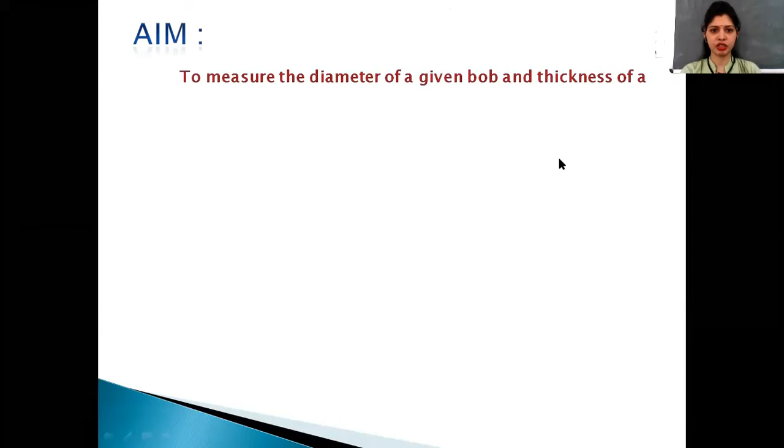Aim of the experiment is to measure the diameter of a given bob and thickness of a given glass plate using micrometer screw gauge.

In this experiment, we will be provided with a bob and a glass plate. By using the micrometer screw gauge, we are going to find the diameter of the bob and thickness of this glass plate. Let us see the apparatus. Apparatus are bob, flat glass plate, screw gauge, etc.

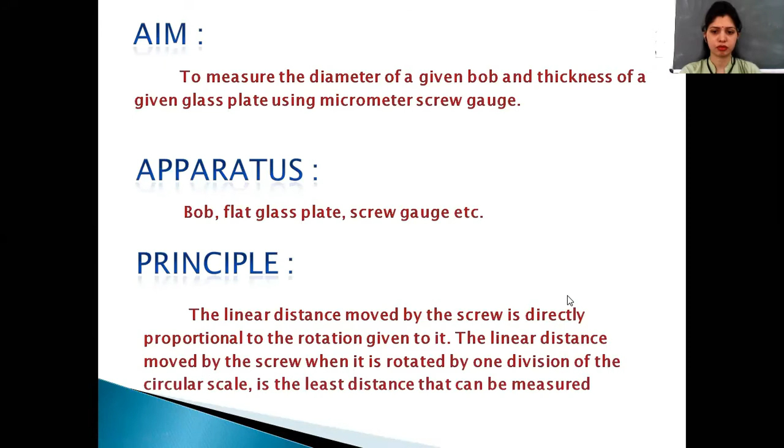Principle: the linear distance moved by the screw is directly proportional to the rotation given to it. The linear distance moved by the screw when it is rotated by one division of the circular scale is the least distance that can be measured accurately by the instrument.

So the principle for this experiment is the linear distance moved by the screw is directly proportional to the rotation given to it. The linear distance moved by the screw when it is rotated by one division of the circular scale is the least distance that can be measured accurately by the instrument, and this is the least count of micrometer screw gauge.

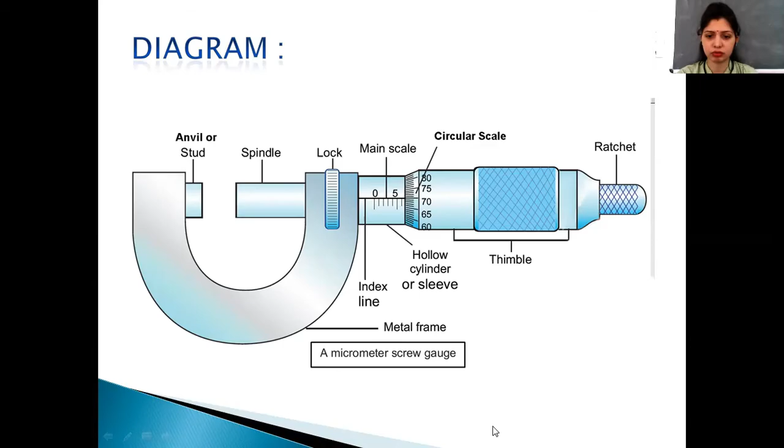The live micrometer screw gauge I will show you, so that you can understand it very easily. I have shown you the diagram of the micrometer screw gauge. Now I'll show you the apparatus to perform this experiment.

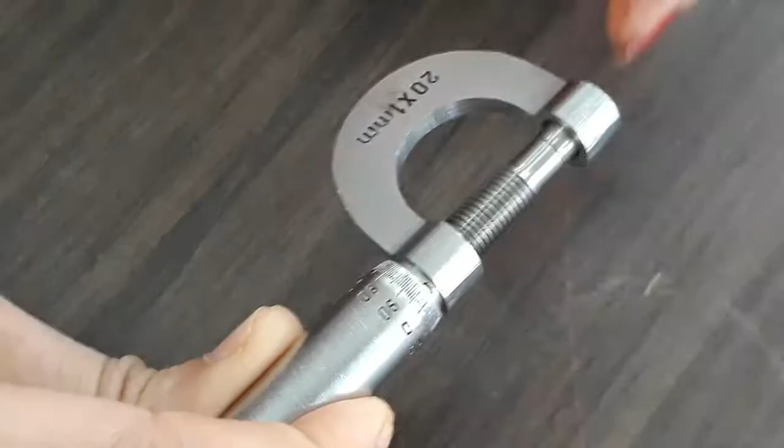This is called the micrometer screw gauge, and to perform the experiment we need apparatus such as this bob. Its diameter we are going to calculate, and this is the glass plate. The thickness of this glass plate we are going to measure by using the micrometer screw gauge. The micrometer screw gauge reading we are going to measure in terms of mm, that is millimeter.

This is the pitch of the screw, and there is one knob. If you move this knob, then what will happen? One scale is coming out, and this scale is called the linear scale, and the one which is round like this is called the circular scale. We are going to deal with these two scales.

This is the linear scale, this is the circular scale, and we are going to fix the apparatus in between these two jaws, and by using this screw we are going to fix it like this. If you rotate this, it is going to get closed. You will be able to hear one sound. Once you hear this sound, you are not going to move this again and again.

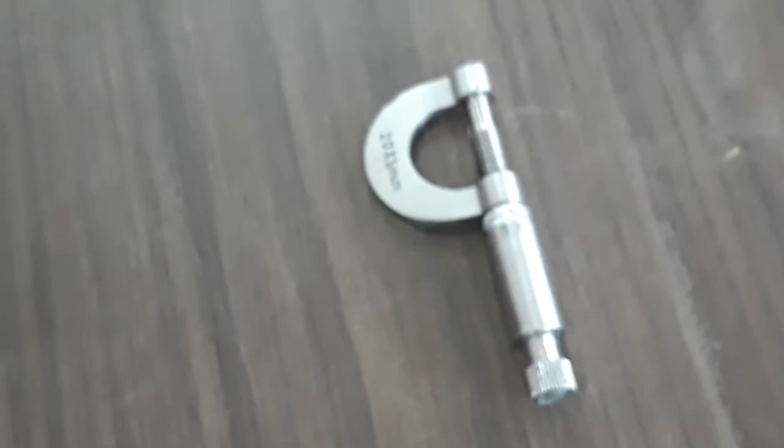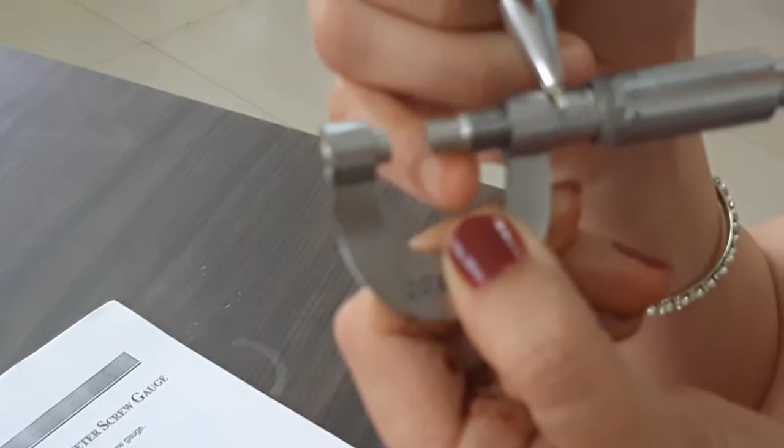Now we'll calculate the observation part. The first observation is given as magnitude of smallest division on linear scale. This linear scale is also called the main scale. Now you are going to open this. If you rotate it this way, you will be able to see this is the main scale or linear scale. Its distance we are going to measure.

How to calculate this? If you focus here, the initial line is 0. After the initial line, there is one number, that is the number 5. So, between 0 to 5, there are 5 lines. 5 divided by 5 is equal to how much? 1. And the screw gauge measurement we are going to measure in mm. So the unit is millimeter. The first observation, magnitude of smallest division on linear scale, is 1 mm.

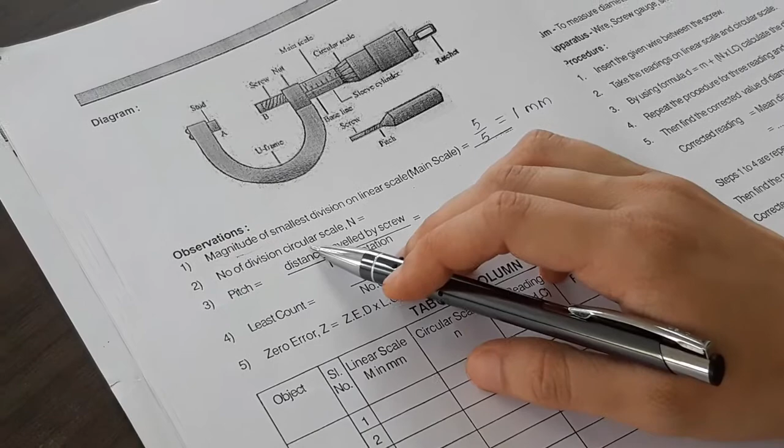Next, number of divisions on circular scale, capital N. If you see this circular scale, it is going to start from 0. After that there is 10, 20, 30, 40, 50, 60, 70, 80, 90, and again it will come back to 0. So the total number on the circular scale is 100.

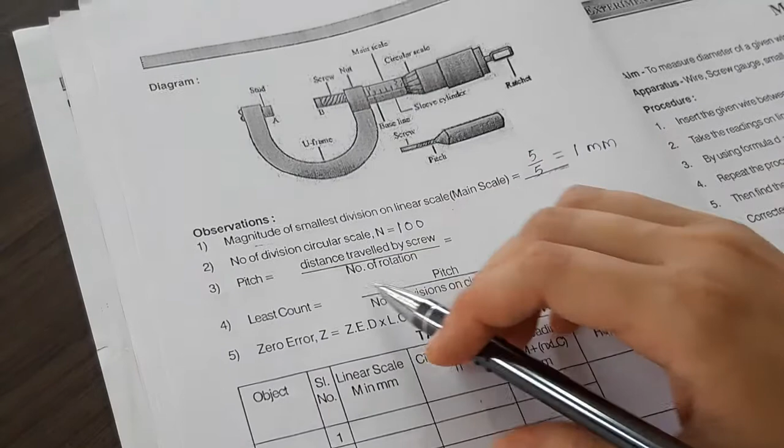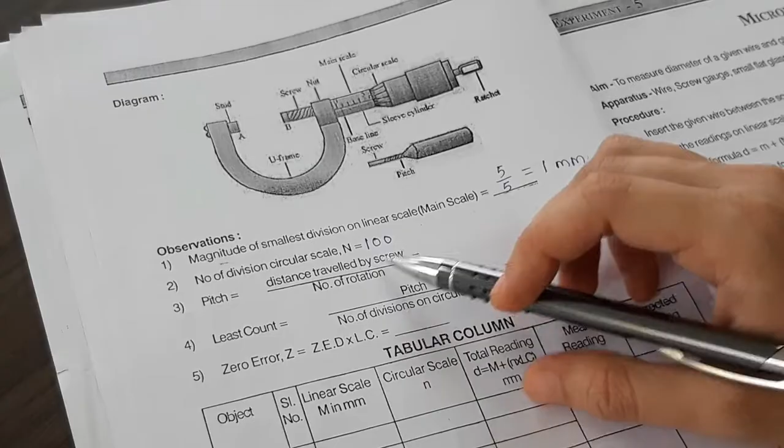Next, the pitch value we are going to calculate. The pitch formula is given: pitch is equal to distance travelled by screw divided by number of rotations. Distance travelled by screw, see here as I told you before, 0, 1, 2, 3, 4, 5. So the difference between each is how much? 1 mm, divided by number of rotations. To reach from 0 to 1 or 1 to 2, we need 1 rotation. So number of rotations is 1. 1 mm upon 1 gives you pitch value as 1 mm.

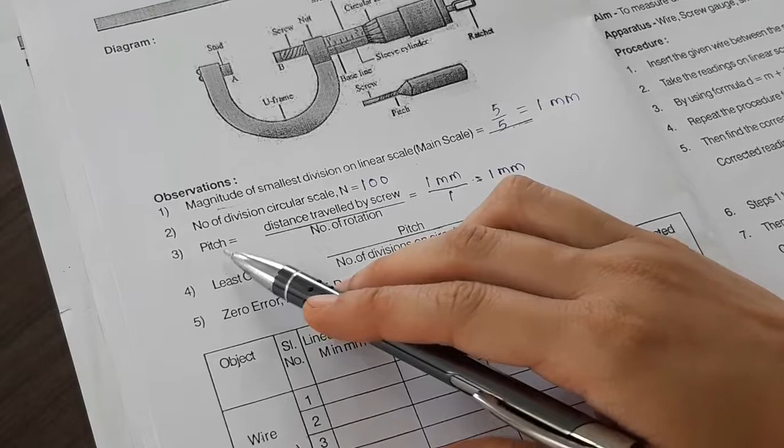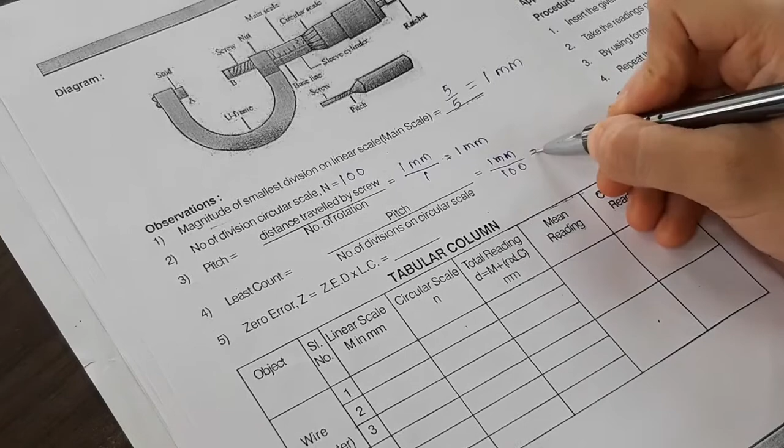Next, least count. Least count is equal to pitch divided by number of divisions on circular scale. We have already calculated pitch, that is equal to 1 mm, divided by number of divisions on circular scale. The divisions on circular scale are 100. So 1 upon 100 is equal to 0.01 mm. 0.01 mm is the least count of the micrometer screw gauge.

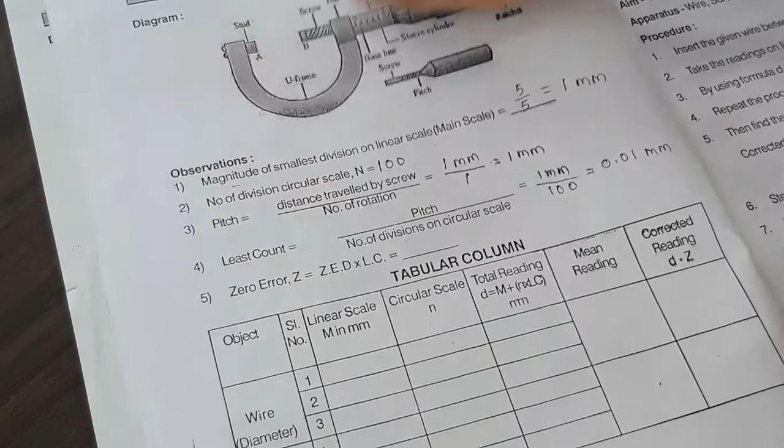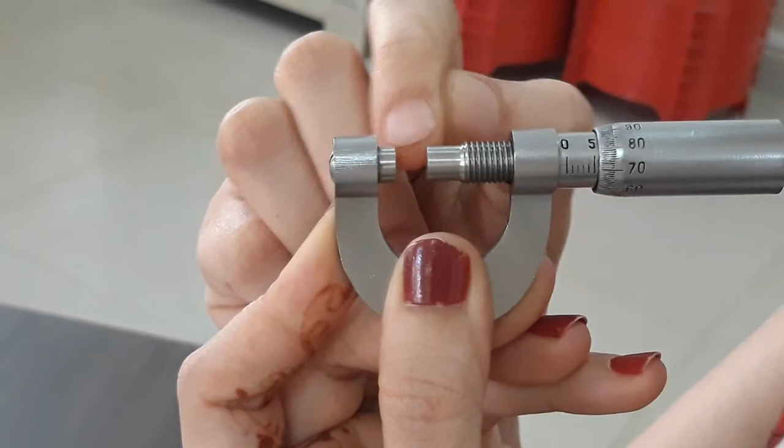Next, zero error. Z is equal to zero error division into LC, that is least count. How to calculate this? I'll just show you. To calculate this, you are going to rotate the screw and close these two jaws till you hear the sound. It is done. Next, the linear scale is horizontal over here. See, 0 is marked here and below that, the horizontal line on the linear scale is here.

Now, where the linear scale is coinciding with the circular scale, that is our error. If you focus here, the linear scale is here and the circular scale is here. So, the number here is 87. Now 87 is here and our 0 is at this point. If the number is down and 0 is above it, then it is considered a negative error. So here we'll put the negative value.

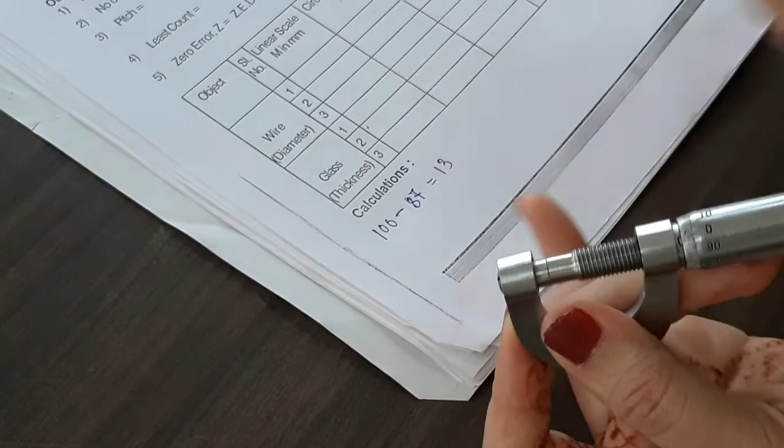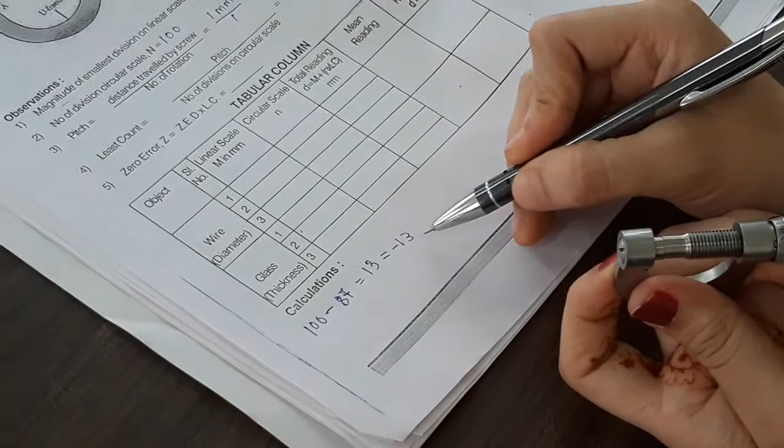Now to reach from this number to 0, how many lines do we require? This 0 is of the 100 number. So let us do the subtraction. 100 minus 87 is equal to 13. Since it is a negative error, it is equal to minus 13. This is our error. Zero error, Z, is minus 13.

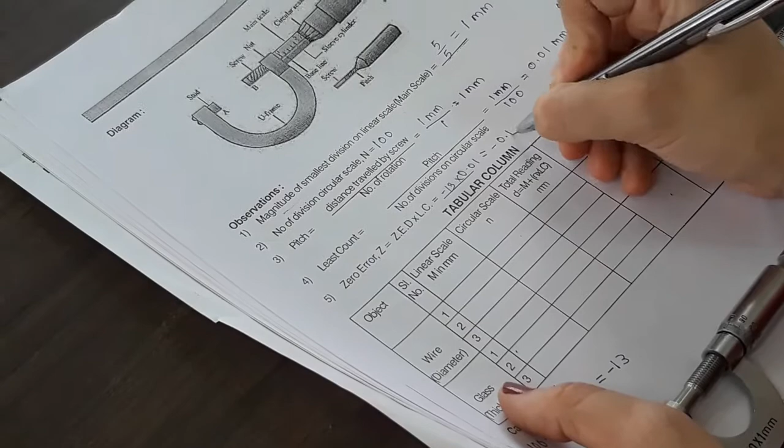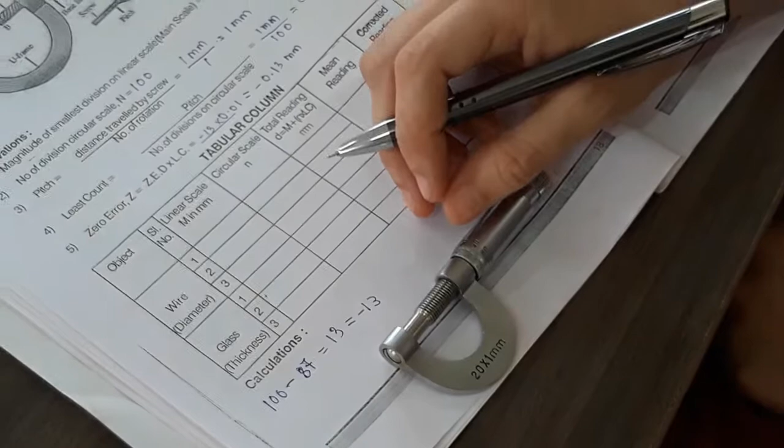So minus 13 we are going to multiply with the least count of 0.01. So the answer we get is minus 13 into 0.01 is equal to minus 0.13 mm. This is negative error. Now sometimes you will get a positive error or there is no error. So those cases also we'll discuss.

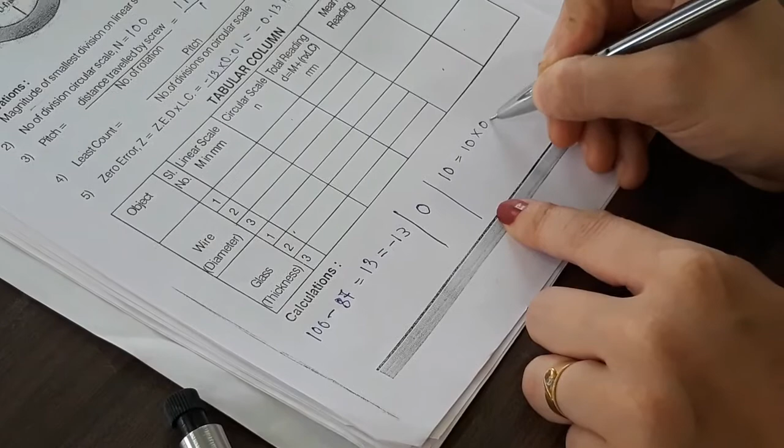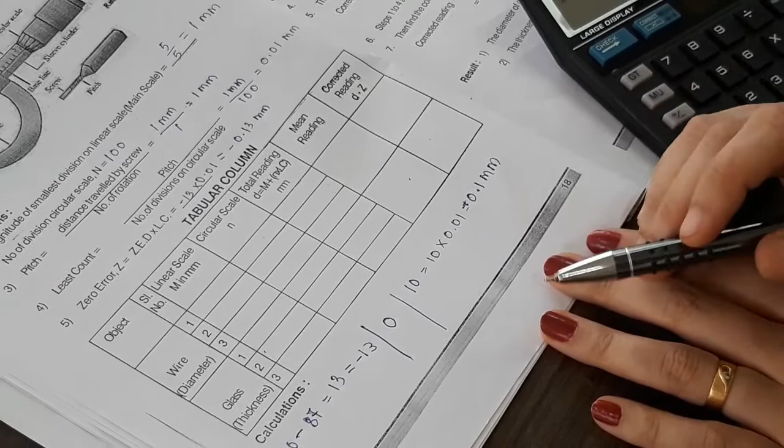10 we are going to multiply with least count 0.01, that is 10 into 0.01. The answer is 0.1 mm. This is positive error, 0.1 mm. So, when you are finding the zero error, there are three possibilities: either it is negative, it is 0, or it is positive.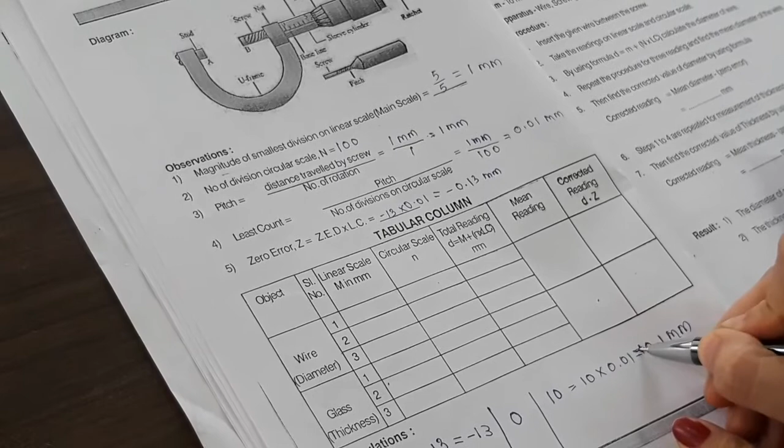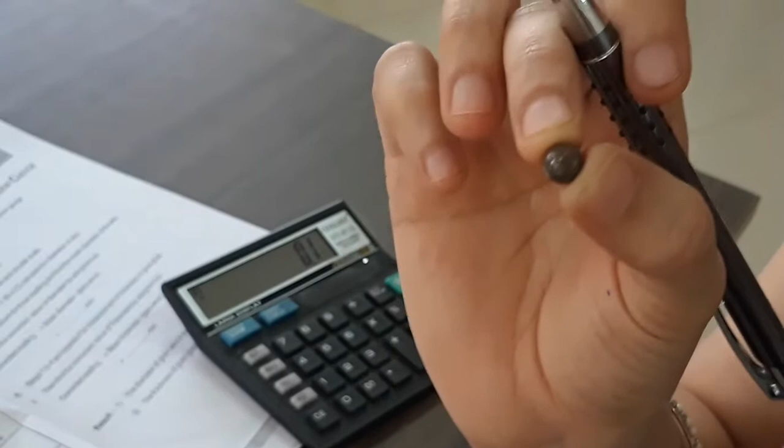Now, for our experiment, we have got the negative error. So, by taking that into consideration, we will calculate the tabular column for this. Now, first here see the objects given. Instead of wire, it is the bob. This is the bob; its diameter we are going to calculate. How to calculate this? Here it is given bob diameter, linear scale capital M in mm.

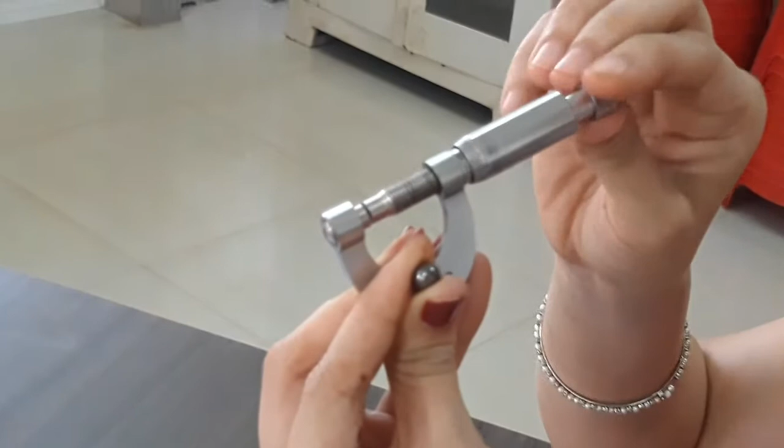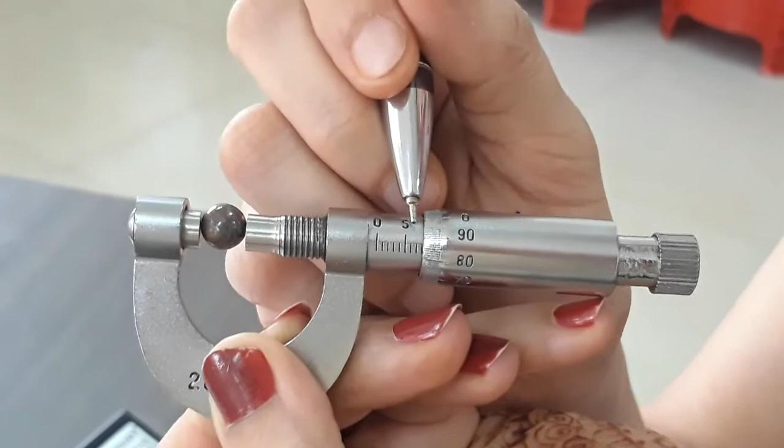So, by using this screw, rotate it. These two jaws are getting separated. Now, place this bob in between these two jaws and close it like this. Next, calculate the linear scale value, linear scale M in mm. Now, see here 0, 1, 2, 3, 4, 5, 6, 7 and 8. So, the linear scale value is 8. 8 lines are present here. I'll just note it down here as 8.

Next, circular scale. Now, this horizontal line of linear scale is coinciding to one division on this circular scale. That number is 88. See here 80, 85, 86, 87, 88. This horizontal line of linear scale is coinciding to 88. So, circular scale small n is 88.

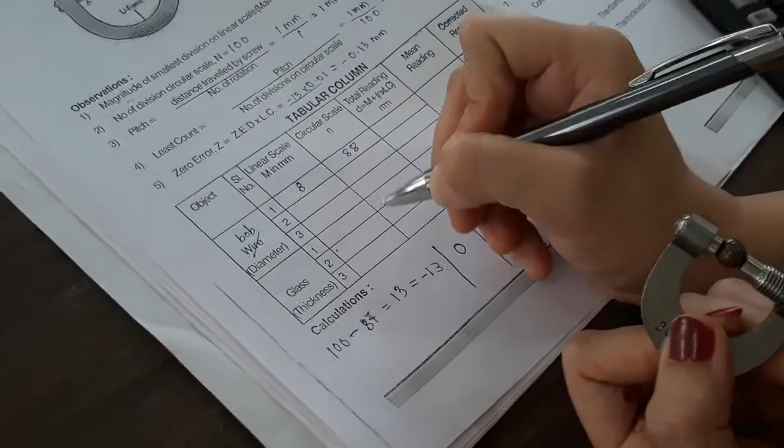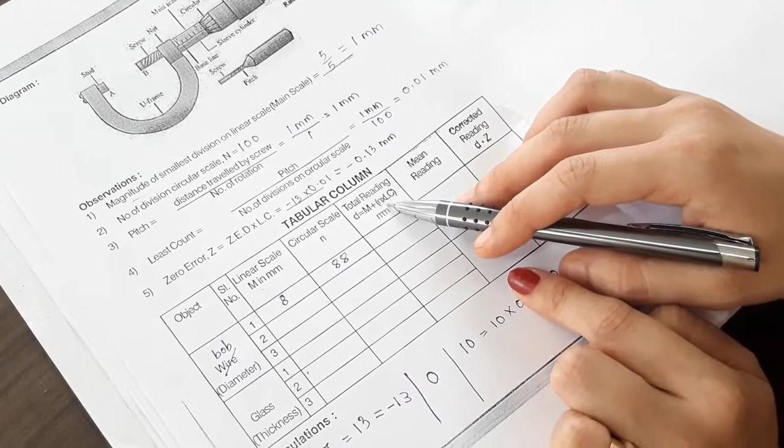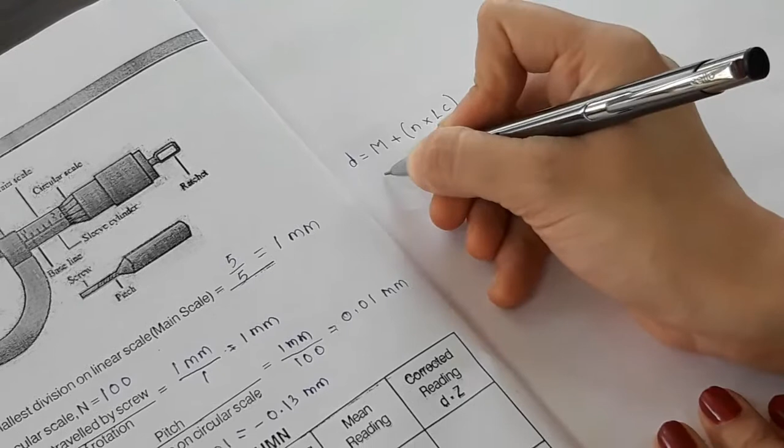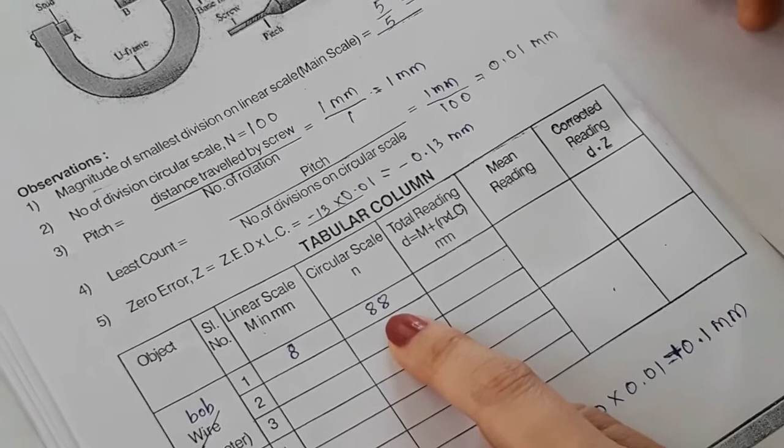Total reading formula is given. D is equal to capital M plus, in the bracket, small n into least count, complete the bracket, and values are in millimeter. I'll just write here: D is equal to capital M plus small n into least count. Let us put the values. We have got M as 8 plus, open the bracket, n we have got as 88 into least count. Least count is how much?

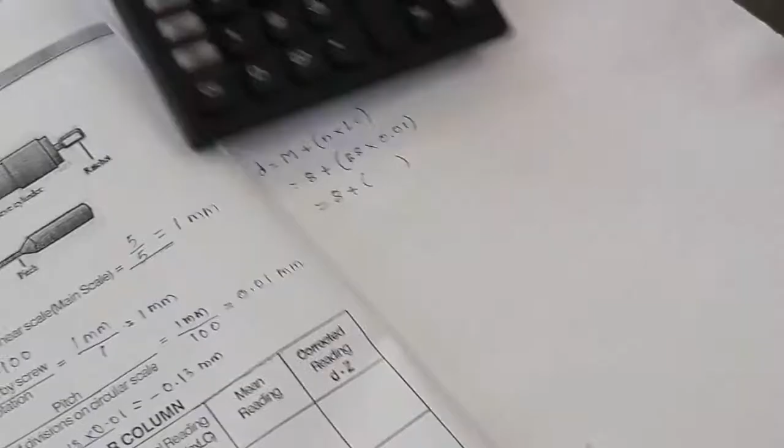0.01. Again 8 we write as it is plus the multiplication of 88 into 0.01. 88 into 0.01 equals 0.88. Now 8 plus 0.88 is 8.88. 8.88 millimeter. This is the first value. We'll just write it down over here.

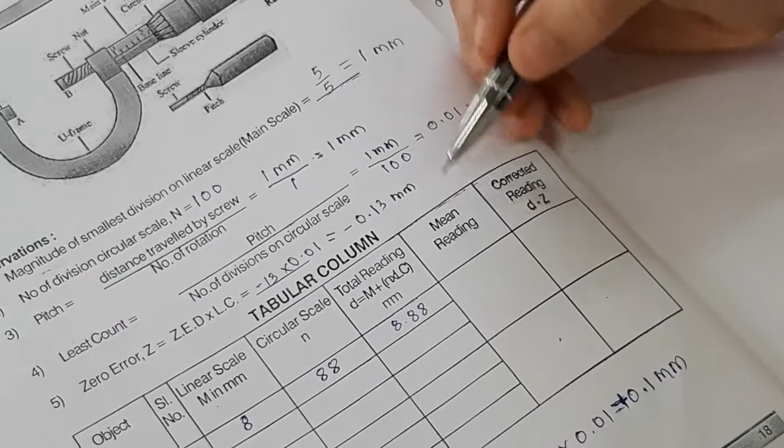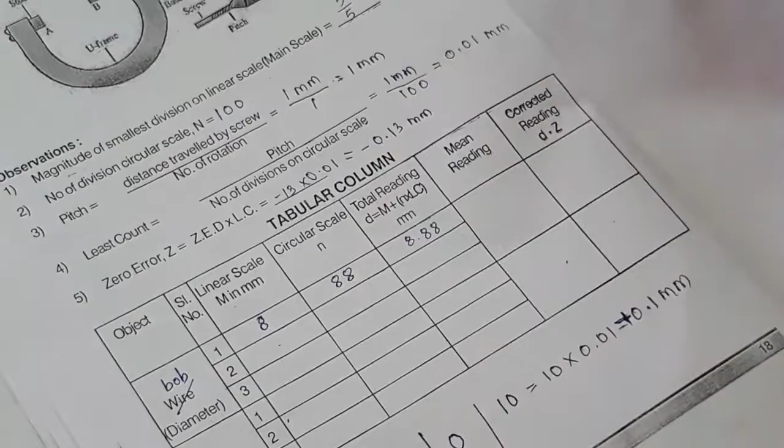8.88. Next, mean reading. To calculate mean reading, we are going to repeat the same procedure 3 times. To get the second reading, that is the second trial, we'll remove this bob, open these jaws, place it again from another side and close this. Now, repeat the same procedure. Linear scale, how much is it? 0, 5, 6, 7, 8. So, again linear scale is 8. Circular scale, see, it is 87. So, I'll write this here as 87. And let us do the calculation.

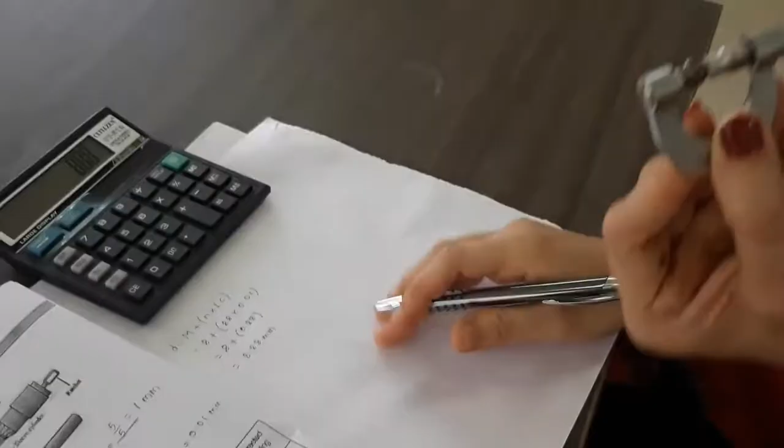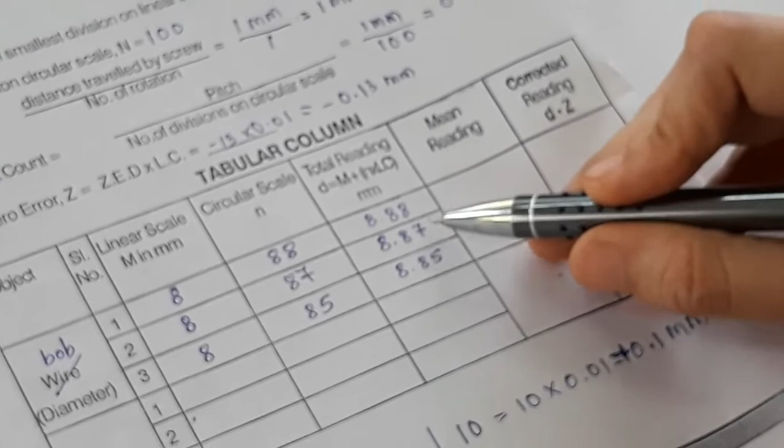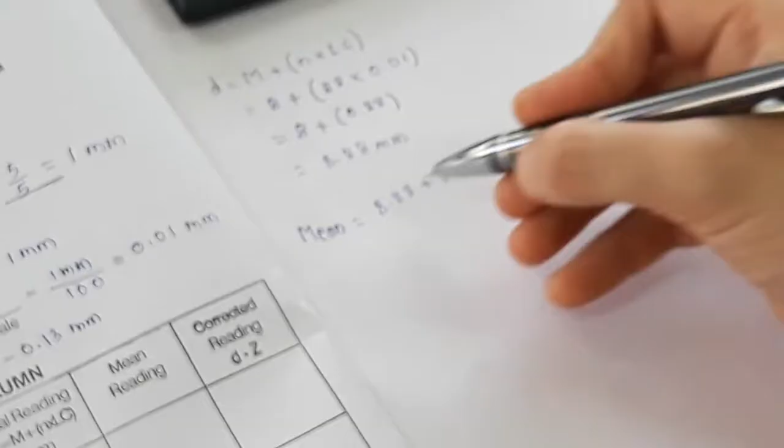I have done the calculation: 8.88, 8.87, 8.85. Now, let us calculate the mean reading of the 1, 2, 3 values. Mean is equal to, these all values we add up, 8.88 plus 8.87 plus 8.85, and since 3 values are there, divided by 3. So, calculation: 8.88 plus 8.87 plus 8.85, divided by 3. Answer is 8.86. So, mean value is 8.86 millimeter. I'll just write here.

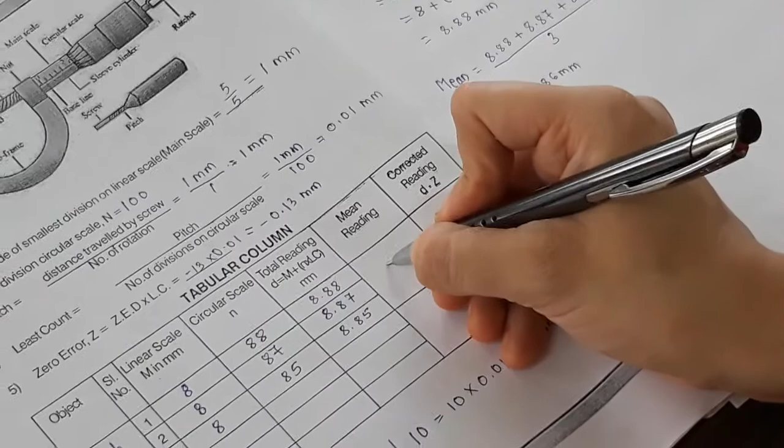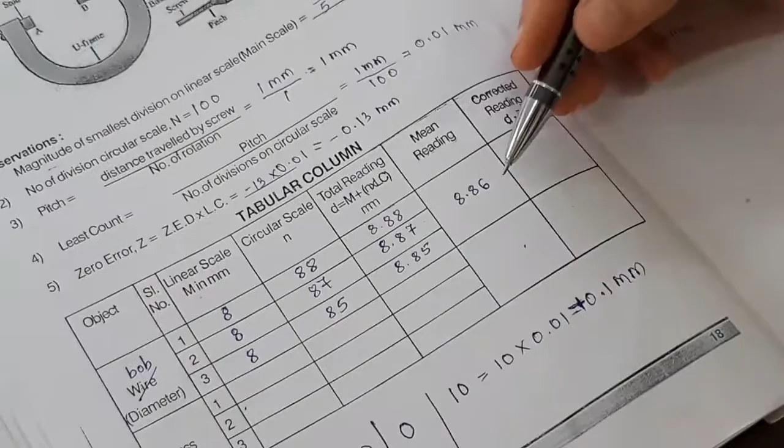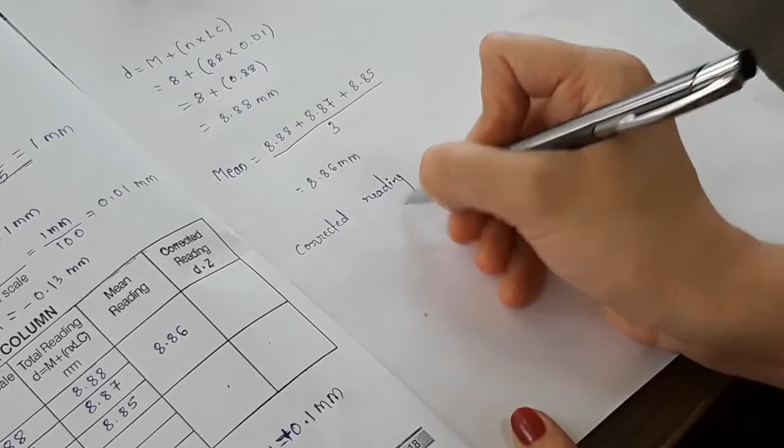8.86. Next, corrected reading D minus Z. The value of mean is D, 8.86, minus Z, and Z is our error. Error we have got as minus 0.13. Let us calculate this. Corrected reading, the formula is D minus Z. So, D is 8.86 minus Z value, which is minus 0.13.

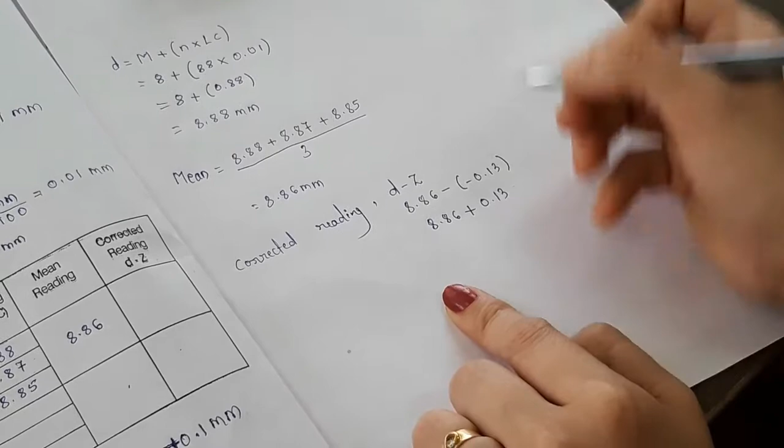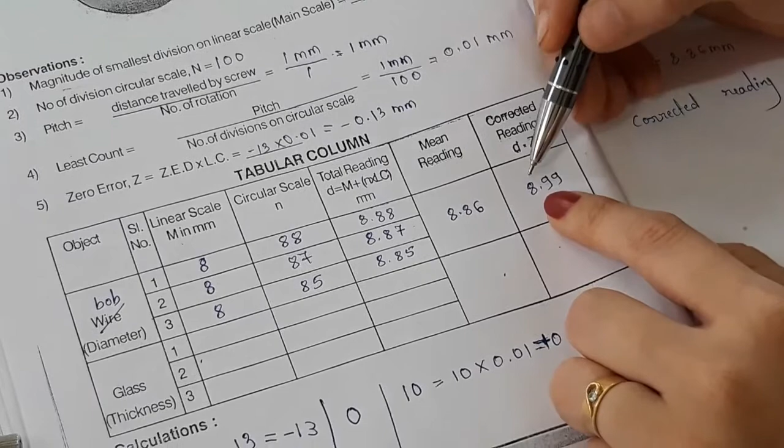So, 8.86 minus minus becomes plus 0.13, equal to 8.99. 8.99 millimeter. I'll just write here 8.99. This is the final value of the diameter of the bob. The bob diameter is equal to 8.99 millimeter. We are going to remove this bob and keep it aside.

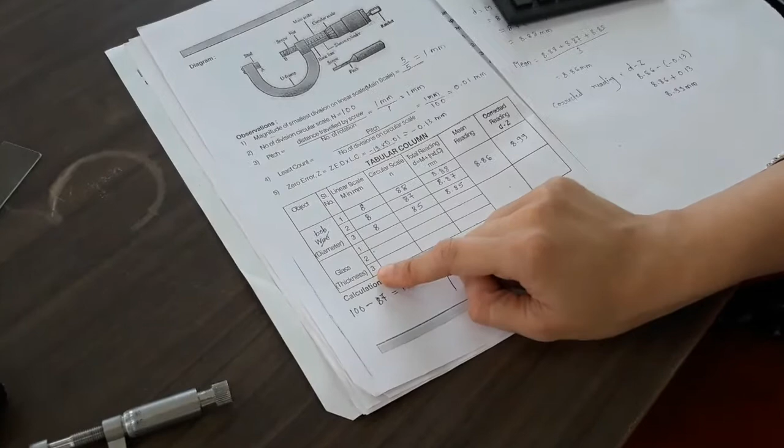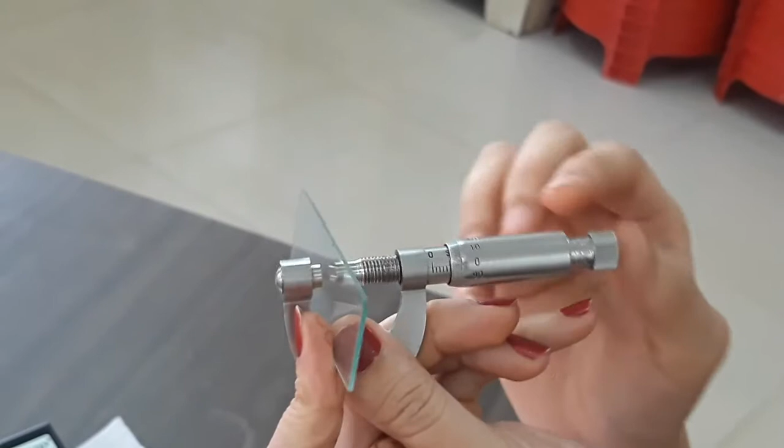Next, glass thickness. We are going to take a glass plate and measure its thickness. This is the glass plate. We insert the glass plate in between these jaws and close this. Next, the same procedure we repeat. First, we calculate linear scale and circular scale. The linear scale value is 0, 1, so I'll write linear scale as 1, and the circular scale is, see here, 21, 22, which is coinciding to this linear scale. So here it is 22.

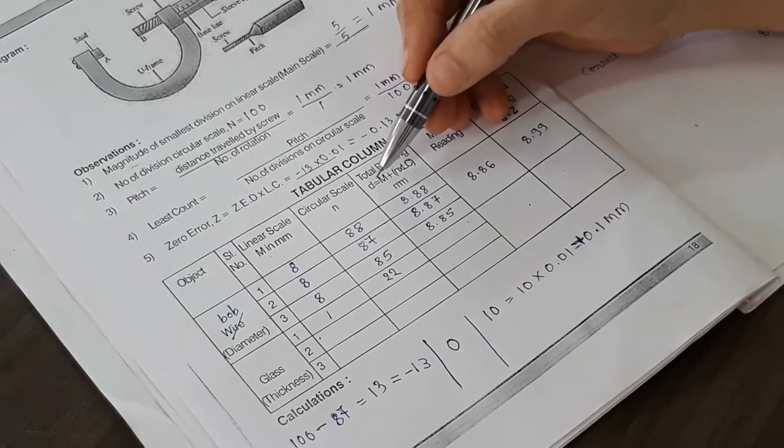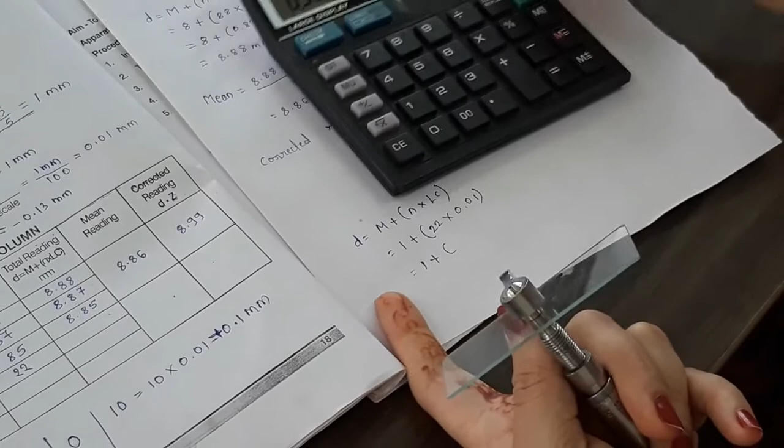Again the same calculation we have to do. Total reading by putting the values: D is equal to M plus N into least count. M is 1, N is 22 and least count 0.01. So 1 plus 22 into 0.01; 22 into 0.01 equals 0.22. 0.22 plus 1 is 1.22. The first value of thickness of the glass plate is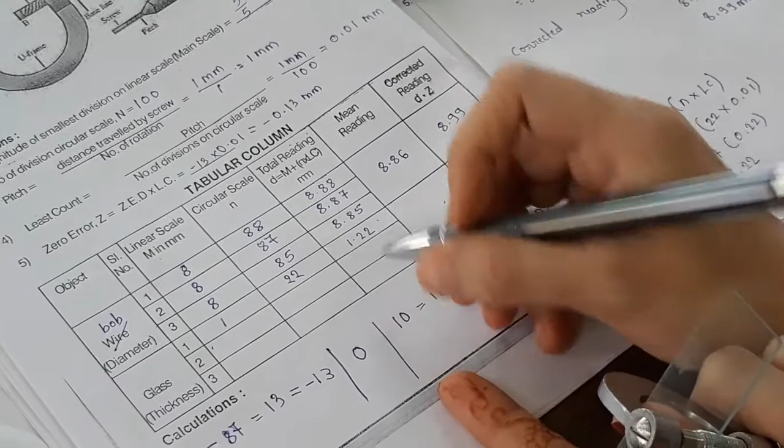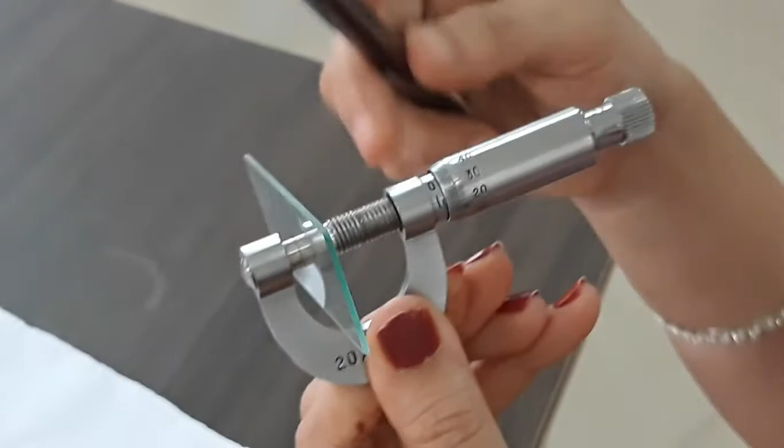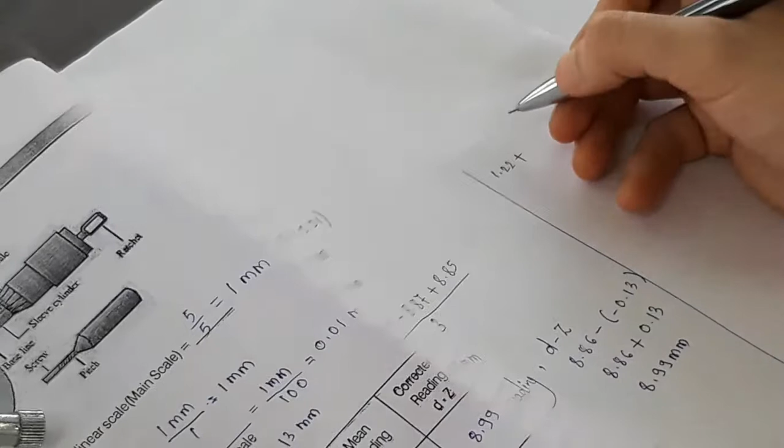1.22. For the next reading, we remove this glass plate and insert it from the other side. Again repeat the same procedure for 2 more readings. We have got the values for the other trials as 1.24 and 1.25. Let us calculate the mean reading of the 1, 2, 3 values. That is 1.22 plus 1.24 plus 1.25 divided by 3, that is the mean value.

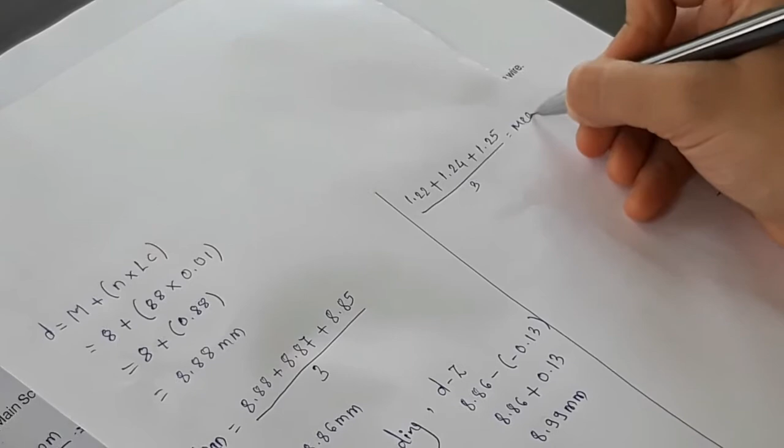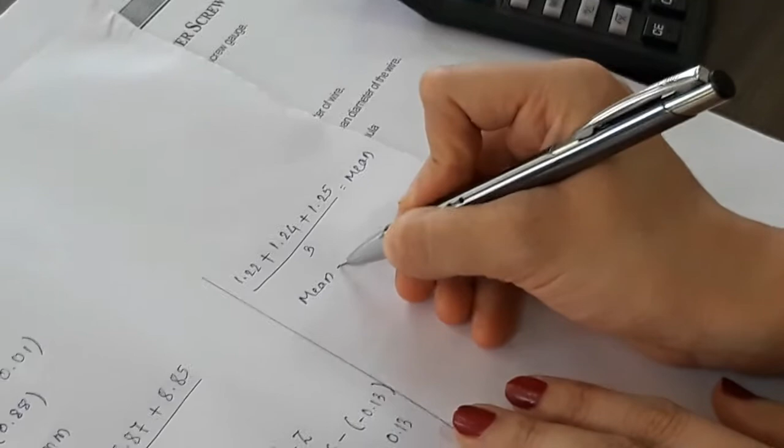So 1.22 plus 1.24 plus 1.25, divided by 3, equals 1.23. So mean value is 1.23. We'll just note down here 1.23 as the mean. Next, corrected reading D minus Z.

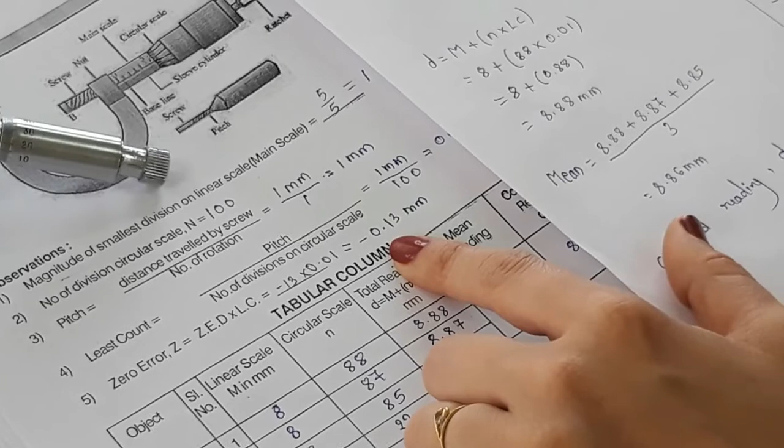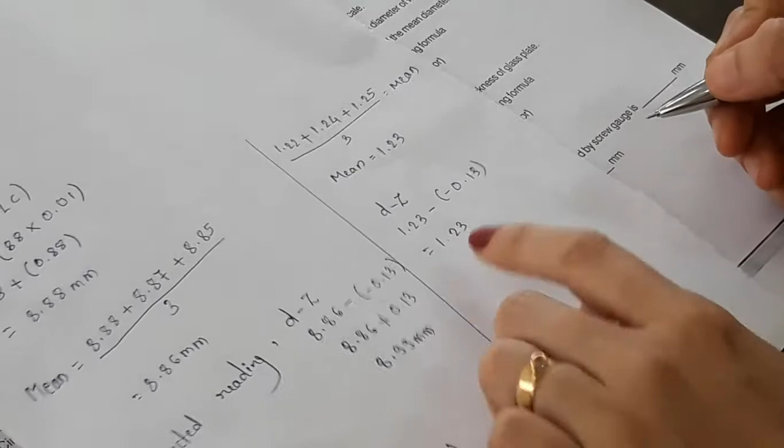D is 1.23 minus Z, which is minus 0.13. So here it is 1.23, minus of minus is plus, so add 0.13, equal to 1.36. 1.36 millimeter.

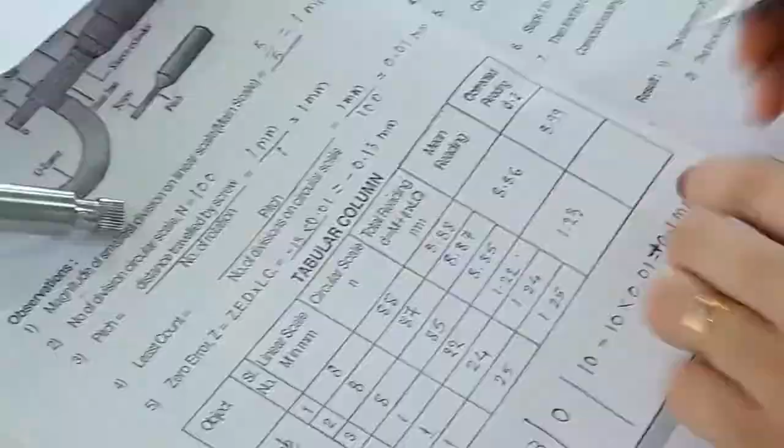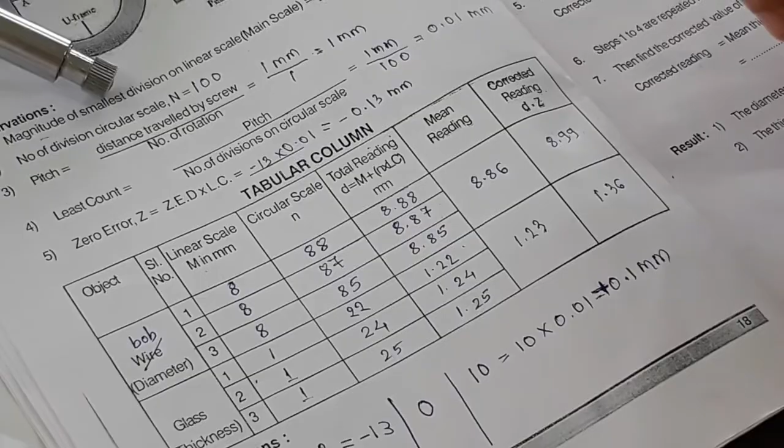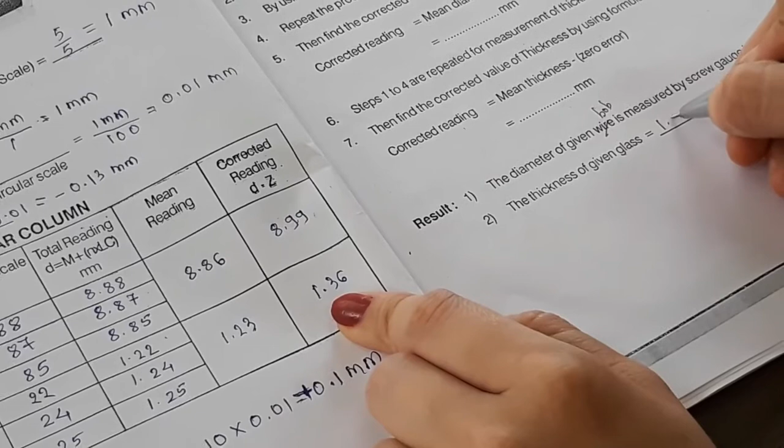So here the corrected reading for thickness of this glass plate is 1.36. Whenever you are writing the values in the tabular column, no need to write the SI units here. Next, the result is given. The diameter of the given bob measured by screw gauge is 8.99. The thickness of the given glass plate is 1.36 millimeter.

So for this experiment we have got the result as the diameter of the bob and thickness of the glass plate by using micrometer screw gauge, and the values for diameter of the bob is 8.99 millimeter and thickness of the glass plate is 1.36 millimeter.

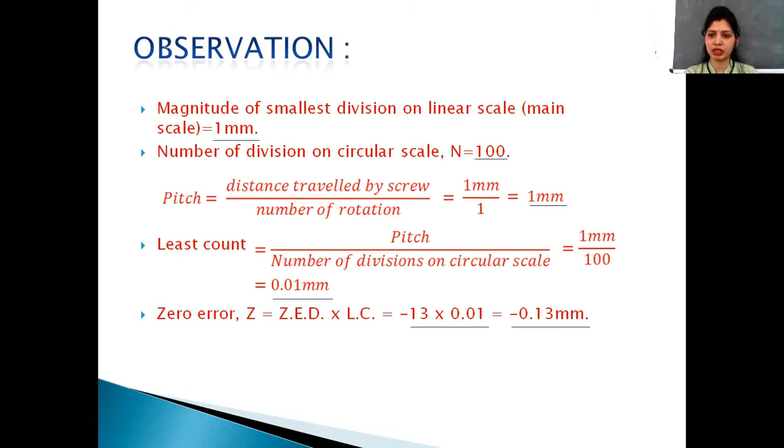So let us calculate the reading with negative error, that is minus 13 into 0.01. Zero error division is minus 13 and least count is 0.01. So total you will get minus 0.13 millimeter. These all are observations. Let us go to the tabular column.

Here we have the tabular column. Objects are the bob whose diameter we are going to find out, and next we have the glass plate whose thickness we are going to calculate. Then serial number, each we are going to measure 3 times, 1 to 3, 1 to 3. Then linear scale, capital M in millimeter.

For the first trial we have got it as 8, circular scale we have got it as 88, and if we put this in the formula small d is equal to capital M plus, in the bracket, small n into least count, complete the bracket with the unit of millimeter, we have got the value as 8.88. Next trial, we are going to just remove the bob from the screw gauge. Again we are going to insert it.

So next time, linear scale we have got as 8, circular scale as 87 and total reading as 8.87. For the third trial, 8, 85, 8.85. Next, we are going to find out the mean of these three values. Since there are three values, first we add 8.88 plus 8.87 plus 8.85 divided by 3. So the mean reading will be 8.86.